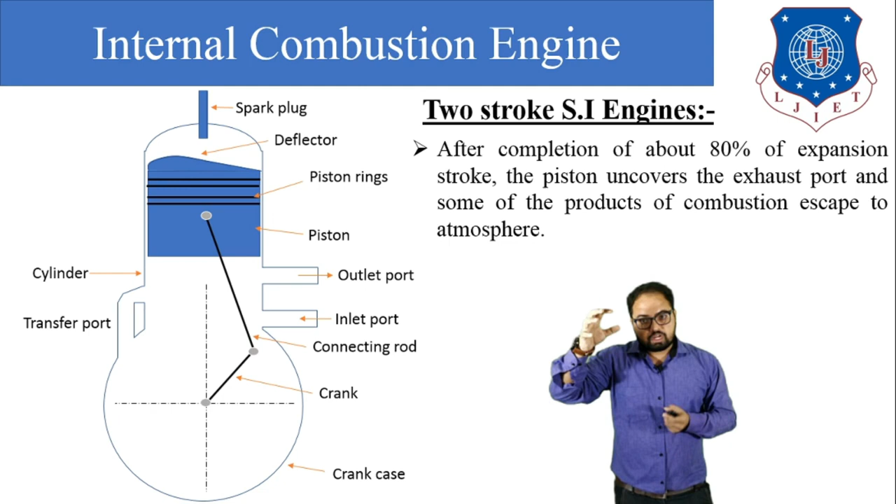When the piston reaches BDC, with the help of the transfer port some amount of petrol and air mixture travels to the upper side of the piston. This fresh charge pushes the burnt gases out of the engine cylinder through the outlet port, and this process is known as the scavenging process during a two-stroke petrol engine.

This is the most important term. So what is scavenging? When the fresh charge enters over the top of the piston, it pushes the burnt gases out of the engine cylinder through the outlet port. This process is known as the scavenging process.

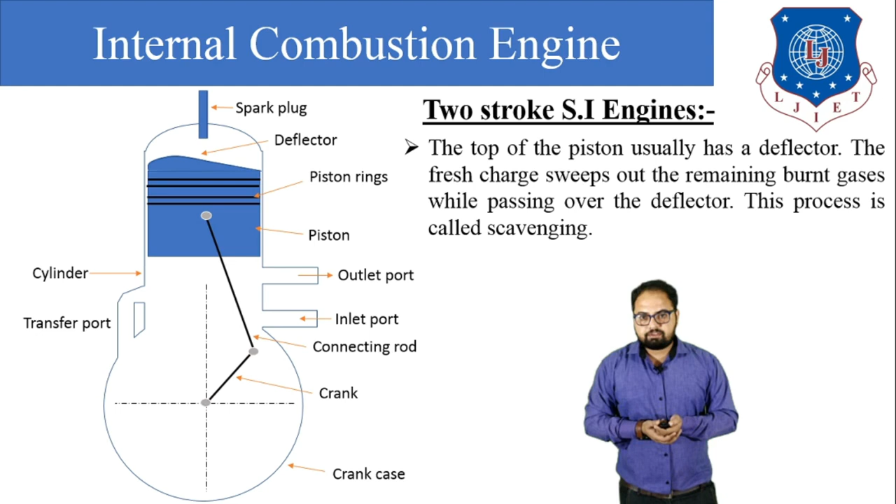Again, at the top of the piston there is a certain shape known as the deflector. The fresh charge sweeps out the remaining burnt gases while passing over the deflector. This process of moving out burnt gases, as we discussed, is known as the scavenging process.

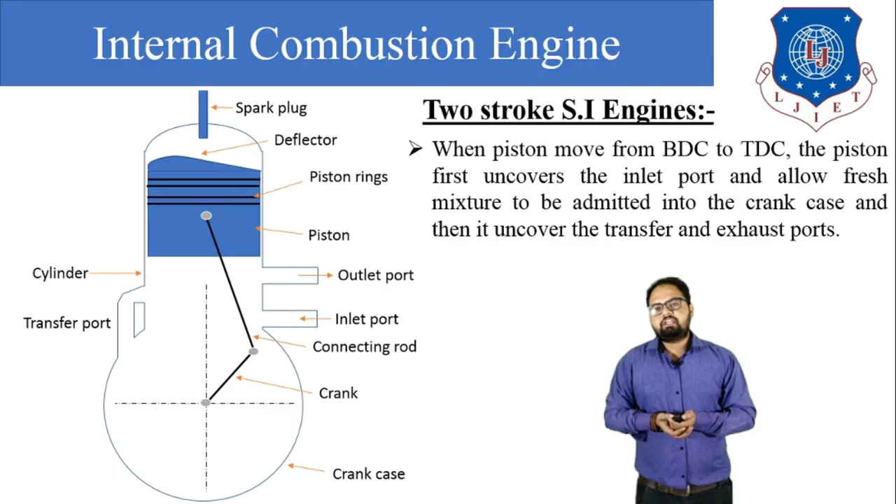Again, the piston travels from BDC to TDC. When it does, it uncovers the inlet port, and again fresh charge enters inside the cylinder and fills the crankcase with petrol and air mixture, and hence the cycle is repeated. So this is the basic working of a two-stroke engine.

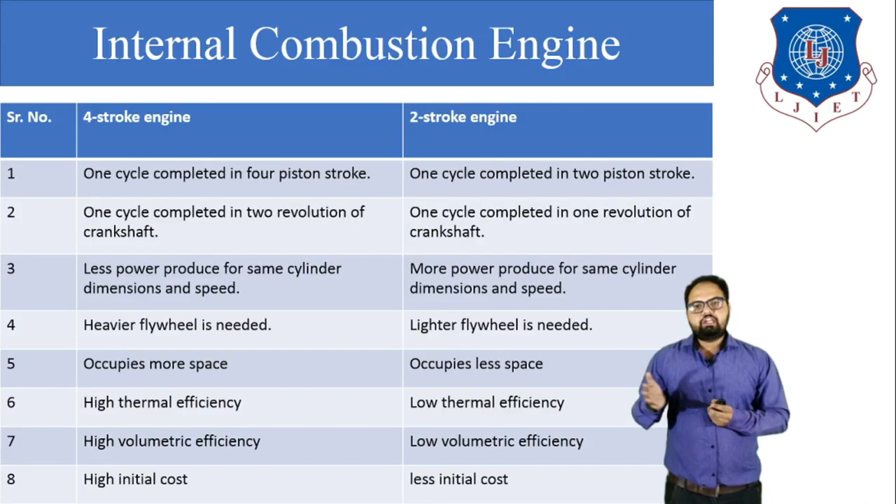The volumetric efficiency of the four-stroke engine is high, while the volumetric efficiency of the two-stroke engine is low. The initial cost of a four-stroke engine is higher than that of a two-stroke engine.

The next one is the two-stroke compression ignition engine, or we can say two-stroke diesel engine. The operation and working of a two-stroke diesel engine is 90% same as a two-stroke petrol engine. The only difference is that in a two-stroke petrol engine, a petrol and air mixture enters through the inlet port, while in a diesel engine, only air enters the inlet port. The second difference is that in a petrol engine a spark plug is used, while in a diesel engine a fuel injector is used. So let's start with the two-stroke diesel engine.

In a two-stroke diesel engine, there are three ports: inlet port, outlet port, and transfer port. During starting, the piston is at TDC, top dead center. When the piston is at TDC, the inlet port is uncovered by the piston, so atmospheric air enters inside the crankcase.

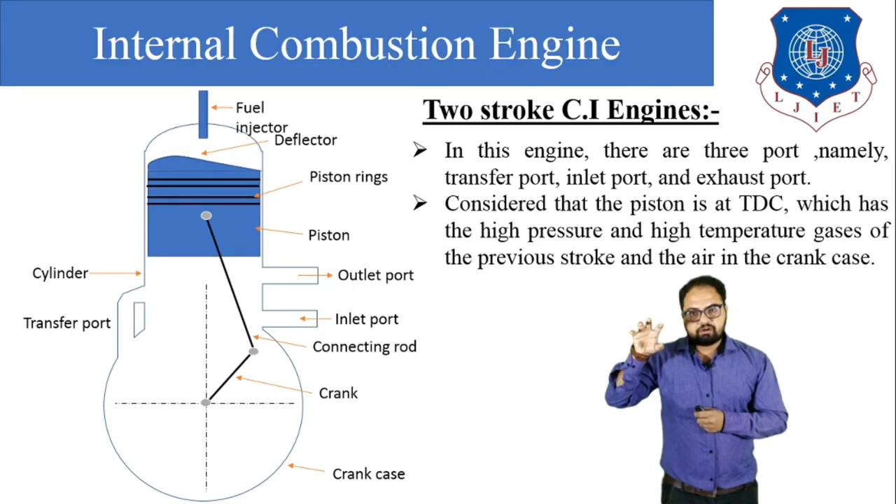When the temperature of the air at the top of the piston reaches the self-ignition temperature of the diesel, the injector injects the diesel in fine atomized particle form, and combustion of the fuel takes place. When combustion occurs, the hot flue gas generated pushes the piston in the downward direction from TDC to BDC.

When the piston moves from TDC to BDC, it covers the inlet port and uncovers the outlet port, and through the outlet port most of the burnt gases are rejected to the atmosphere. But not all the flue gas is able to be rejected this way.

When the piston is at BDC, the fresh charge is transferred through the transfer port to the top of the piston. The fresh charge pushes the burnt gases outside the engine cylinder through the outlet port, and this process of pushing the burnt gases outside the engine cylinder is known as the scavenging process.

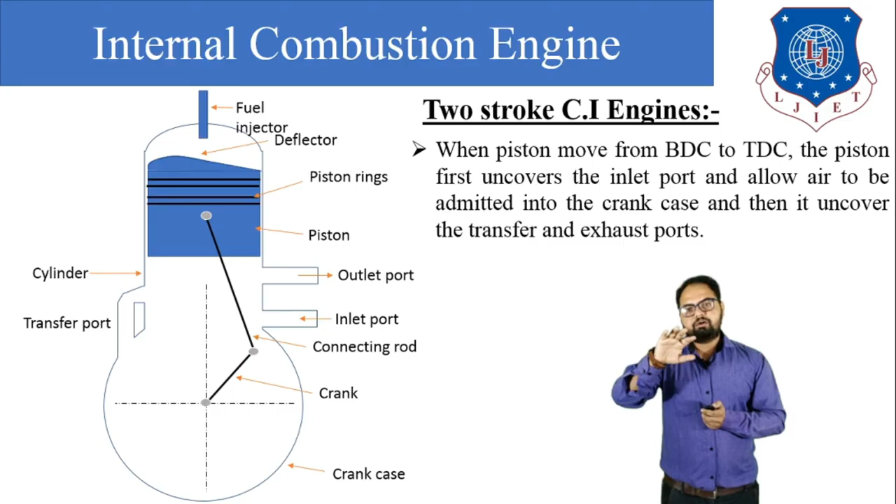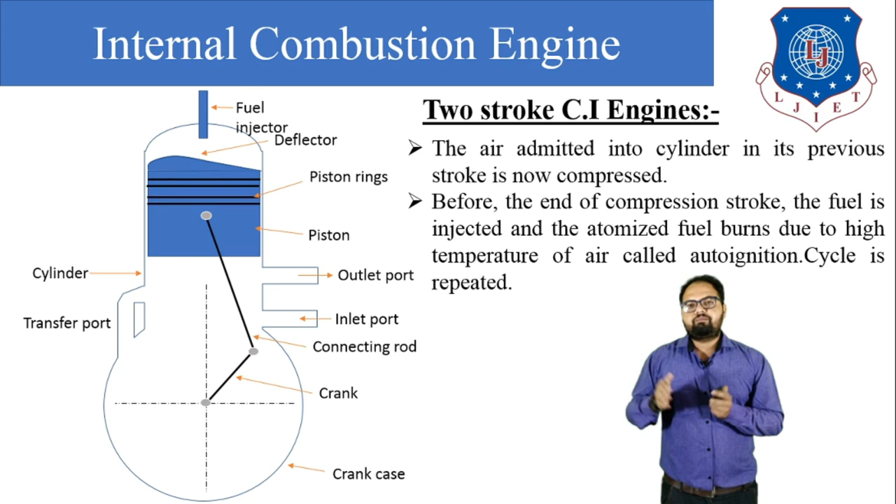During the next stroke, when the piston moves from BDC to TDC, it again uncovers the inlet port, and the rest of the air enters inside the crankcase. The air or fresh charge above the piston gets compressed, and the cycle repeats.